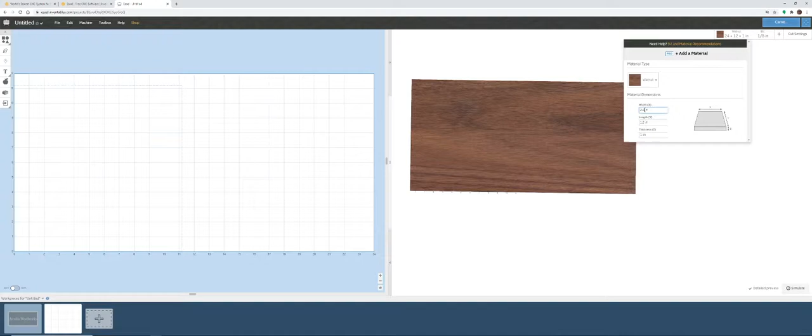And then dimensions, width, length, and thickness. Today we are going to be making our piece 24 inches long, 12 inches high, and it's about 1 inch thick. Once you get that done, you can check over here on the bit side.

Now, if you have just the regular free version, it gives you these bits right here, and then you can add other ones if you need to. But if you have the Pro version, now you can start using these 30 degree, 60 degree, 90 degree V-bits, as well as others that you can add in. The V-bits are pretty interesting, they give you a pretty awesome result in most cases. If you've never seen it before, check out other videos and see how it works out. We'll post an after action review once we get this project done.

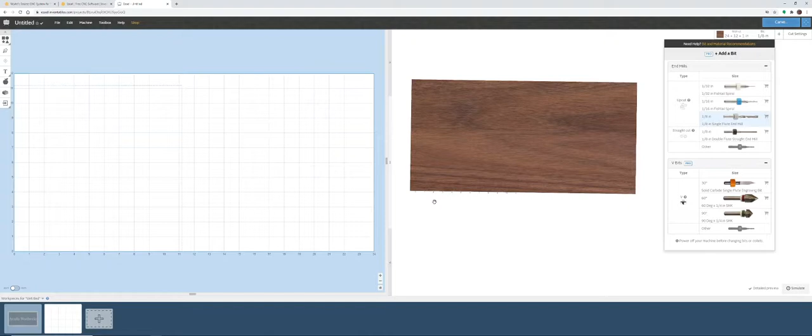So moving forward, we're going to start out by designing what we want it to look like. I mean, obviously I've already done it so I already know what it's going to look like, but for you guys, let's start over. So over here we've got our main piece of wood, and we want it to have a little bit of an inlay. To do that, we put in here just a regular box, and we're going to stretch it out, and we want it to be about 1 inch away from all the sides.

Okay, that looks pretty good. Now to help out and make sure that everything is where it should be, you can click on the item itself that you want to manipulate. Click edit, and then center to material.

Looks like we were pretty much already on the money, so we're good to go there. Now we're going to figure out what else we want to put on it. Because we're doing a business sign, we definitely want to put the name of the business.

So we come over here to fonts, and this is going to allow you to put in whatever text you want, and you have all these different types here. Now if you have the regular free version, I don't believe you can add new fonts. You just have to use what they have here, or create something outside of Easel and import it later. But if you have the pro version, or even a 30-day free trial, you can come up here and add different ones. We're not going to do that right now, but we'll take a look at it.

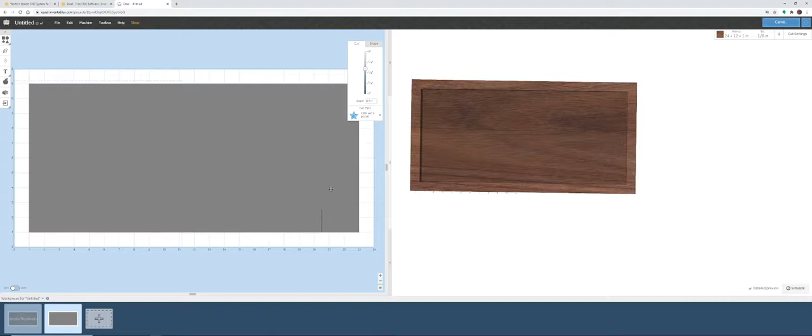We'll do Baskerville, we like that one. All right, and then just type in whatever you have.

Now you can't see it because it's about the same level as what the background is actually carving. Now you have two different options here. If you want the letters to actually stand out, you tell it over here not to cut it at all. Looks like I had some errors here. There we go, okay. So we're going to move this up into the middle.

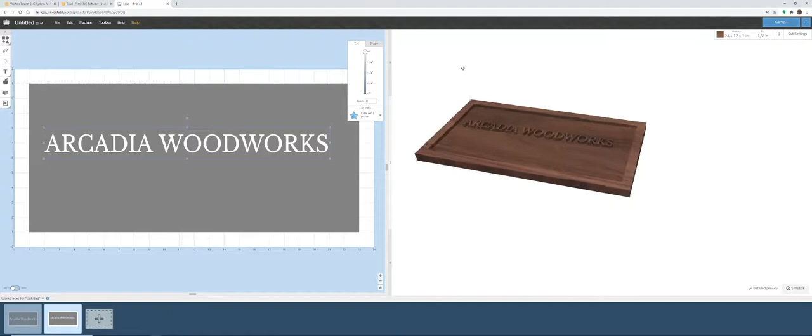Now because we're telling it don't carve these letters out, it's actually going to be carving around them. So if you look at the right-hand side, you can see it's actually raised up, which gives it a really cool 3D effect.

Now if you want to go the opposite direction, you can tell it to carve all the way down. If you go all the way to the thickness of the wood, it's actually going to cut through the other side, which can be helpful if you want to cut out actual objects in the future.

We're looking to make some pretty big welcome signs, so what we're going to do is multiple letters, have them be pretty big, and then cut them out all together.

And as you can see, it changes on the right-hand side with the depth, and then it also changes with the different bits that you use.

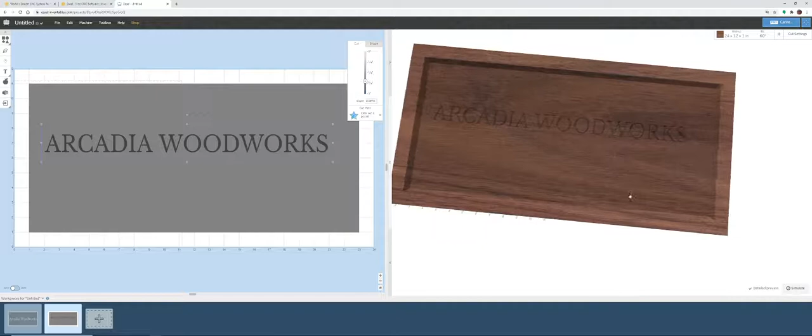Pretty neat. So again, two options: if you want it to go in, or if you want it to come out.

Me personally, I like this look better, so we're going to stick with this, and let's stretch this out and make it fit the length of our interior here. So, look about right. I want to make sure that the A and the S from the beginning to the end are even with the other side, and maybe make it a little bit taller.

Okay, now that we have that done, we're going to center it to material. Okay, right there in the middle.

So at this point we've got our words, and we don't really want to write anything else. So what else can we do? We can bring in some images. You go over here to this apple, and you have a whole bunch of different images to choose from. Again, if you want to use something else that Easel doesn't have, you can import the SVG file, and then use pretty much anything that you want. But you have to use a converter sometimes if the file itself isn't an SVG already.

A good one that I've been using is Convertio, not sure how that's pronounced, but we'll check it out later. Another easy one to do is go to Google and type out what kind of picture you're looking for, and check it out as a vector.

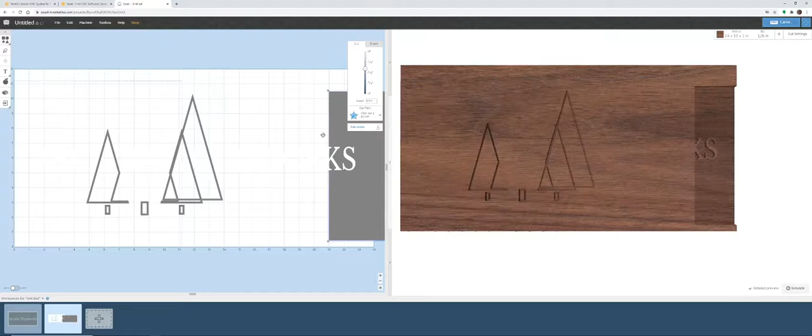Oh, we lost it. You know what, I think we completely lost them. Let's go back. Okay, so we're gonna Control Z. If you didn't know, Control Z does an undo, which is pretty helpful.

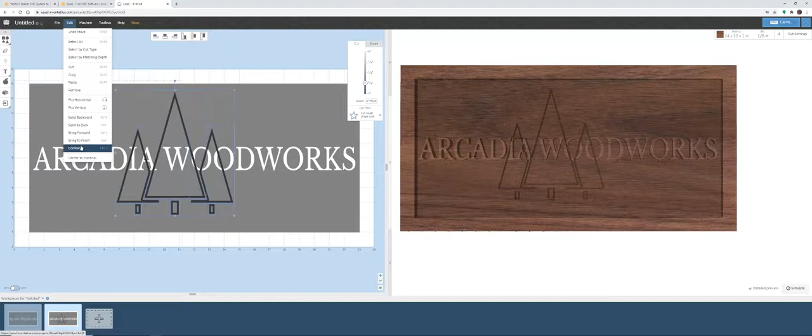What I did here was combine the pieces. For whatever reason, these images come out into multiple pieces so you can move them around. You can change it up however you want, but I like it how it is. So you click on it, go to edit, and hit combine. It's not here anymore because I already did it. Then we're going to center to material.

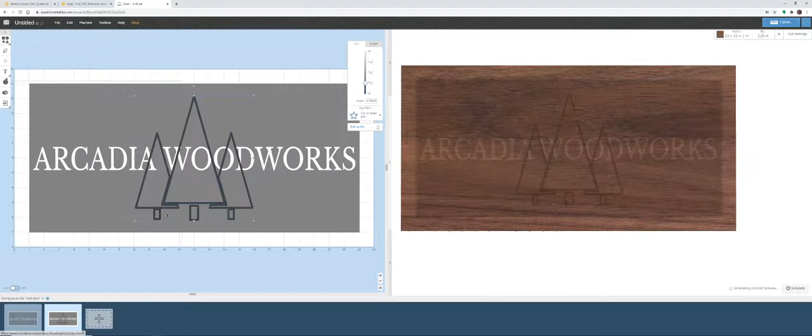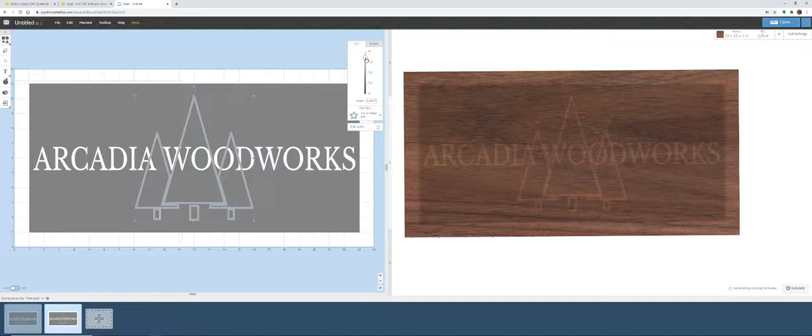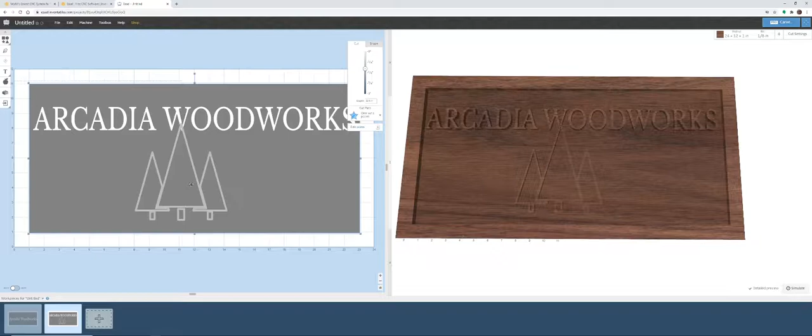Now it kind of looks funny, like it's cutting through our piece. So I think we're going to bring it up a bit, so it's raised, kind of like the other one, but it looks like it's still messing it up. So how about this? How about we just... how about we do this? Alright, that doesn't look too bad.

Again, just like the words were telling it, don't carve into the image, carve around the image. And I keep messing up the background.

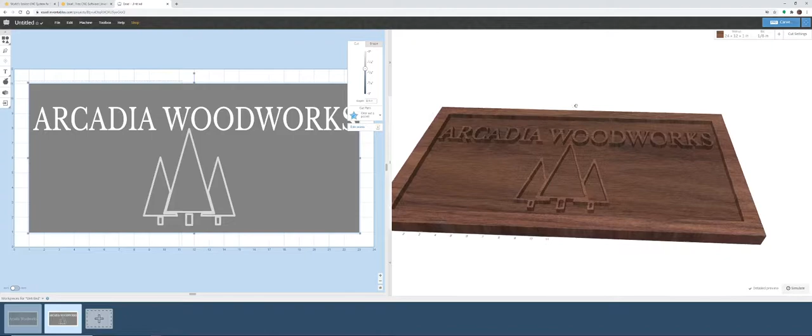Okay, edit, center to material. Okay, so if we look over on the right hand side, you're going to see this is what the image is looking like. It's pretty simple, but it's pretty cool. I think that's going to turn out really well.

If you click on the simulate button, it's going to tell you what path it's going to take and how long. What we just did is saying it's going to take 13 hours and 54 minutes. That's a long time to carve, so let's see if we can drop that down at all.

So here we have it carving to about a 0.4 inch depth. Let's bring that up to 1/4 inch so it's not so deep. Simulate again. Alright, now we're down to 8 hours and 39 minutes versus 14 hours. That's quite a big drop, but still almost 9 hours.

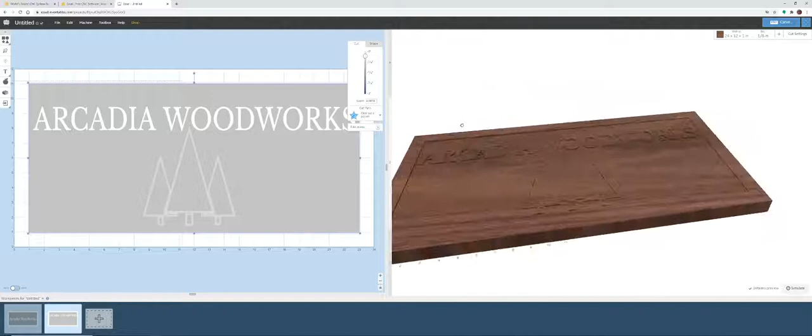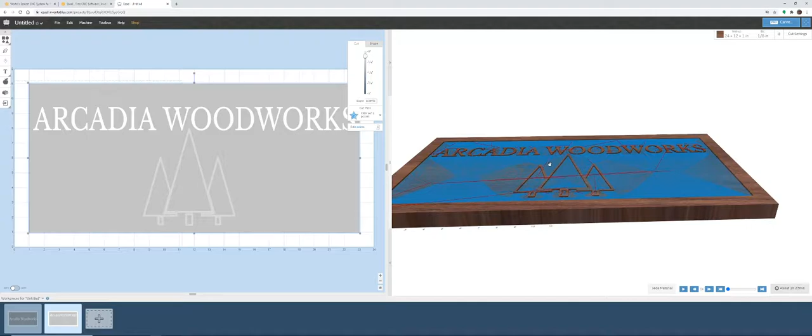Alright, so we raised up the background a bit, so it's not going to be carving this huge piece out too deep, because what the machine does in order to save the bits from breaking is it actually goes slower, and it only goes down so far without having to come back to the same area and carve again as it goes down further and further. So every bit that you go down, the deeper the carve gets, the more passes it has to make. And especially it makes it a little bit harder because it has to carve out the words and the picture and everything.

So over here, as it's at 0.90 inches of depth, we'll simulate that. It's going to take a long time. Yeah, 33, almost 34 hours just to carve that.

Alright, so we're going to bring it back up to about 0.12. With the image the way it is, it doesn't look like anything is happening, or at least not much of anything. So we're going to move it around using the left click on the mouse. And you see it actually is raised up quite a bit.

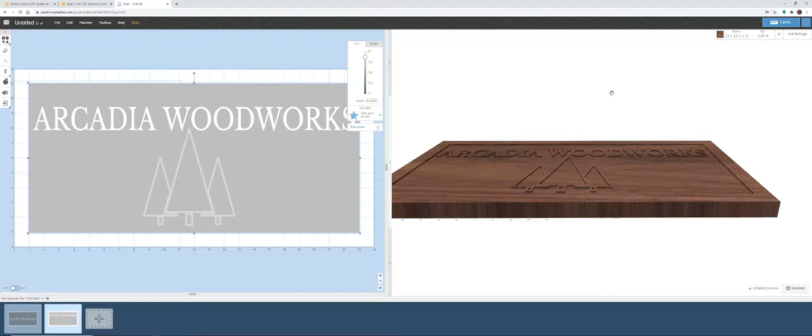So we're good to go. We'll try this out. Simulate again. I'm thinking probably going to be around 8 hours. Oh, now we're down to 5 hours. So we're good, but 5 hours is still quite a long time. How do we fix that?

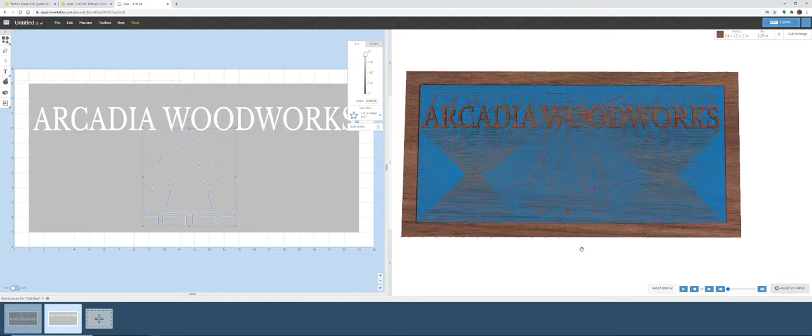Yeah, we're still figuring out how to make these things work to the best of its ability, but right now it looks like this is going to take us roughly 5 hours. Maybe we can get it going faster, I'm not sure.

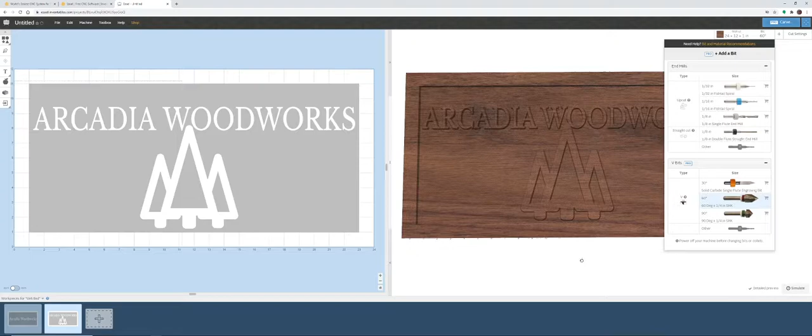Using a different bit can sometimes change the effect of what's going on, not only the look of it, but how long it actually takes. So yeah, we changed from a 1/8 inch bit to a 60-degree V bit, and now we're at almost 13 hours. So we're going to change back to that 1/8 inch single flute.

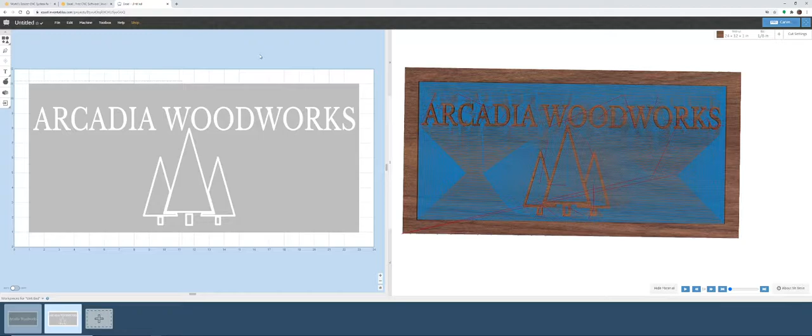Alright guys, that's a pretty easy setup for this kind of situation. So if you got a business, or if you're just looking to make a sign at home for whatever reason, it's pretty simple. The software is not bad at all, especially for beginners. If you get out there and try those upper level softwares that different companies have made, it's going to take a little bit more. There's quite a bit of a learning curve in figuring out how it all works.

So if you're just getting into CNC work, stick with it. I know it took me a long time to begin with, trying to figure out how to get things to operate overall, but it's worth it in the end. You get to do some really cool stuff, and Easel is a really good program for beginners to get there and to be able to make some money if that's what you're looking to do.